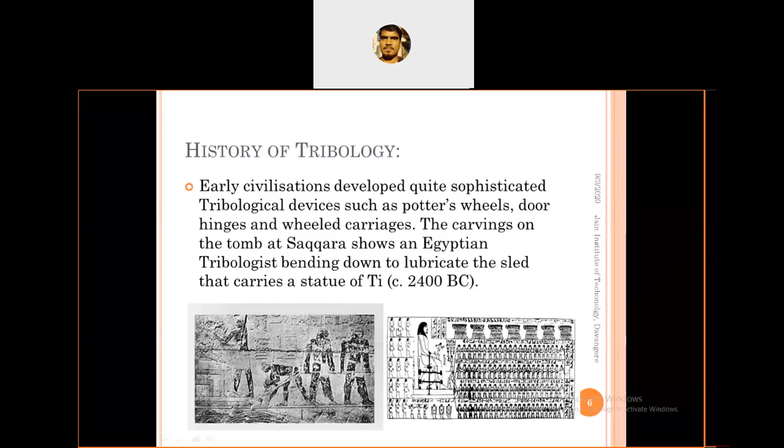That's why nowadays we can see the Egyptian pyramids. The pyramids are huge constructions. They were constructed in BC, between 4000 BC and 1800 BC. Those pyramids are made of huge stones, and the stones were carried from some other place to that exact place using this technique. So by observing this, we can proudly say that tribology is very old knowledge our ancient people were aware of. It's one simple example.

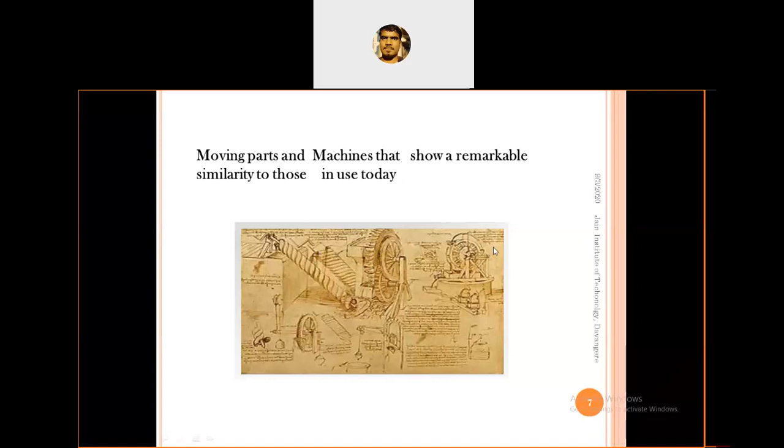The next example: we can see moving parts, machine parts that show remarkable similarities to what we use nowadays. The old Indus and Mohenjo-daro civilizations used these moving parts and some small machines, and those machines are very similar to the machines we are using now. It is also one remarkable step towards tribology, and effective evidence that tribology was used by ancient peoples.

Next, coming to the history in the 15th century, between 1452 and 1519, Da Vinci introduced for the first time the concept of coefficient of friction as the ratio of the frictional force to the normal force. Da Vinci is the first. He introduced not tribology, but the concept of coefficient of friction as the ratio of frictional force to the normal force or load.

He also gave laws governing the motion of a rectangular block sliding over a flat surface. He studied tribology as an experiment: a rectangular block sliding over a surface. When one surface slides over another, definitely there is friction, and friction gives the coefficient of friction. That is what he discovered. He is the first person who discussed tribology.

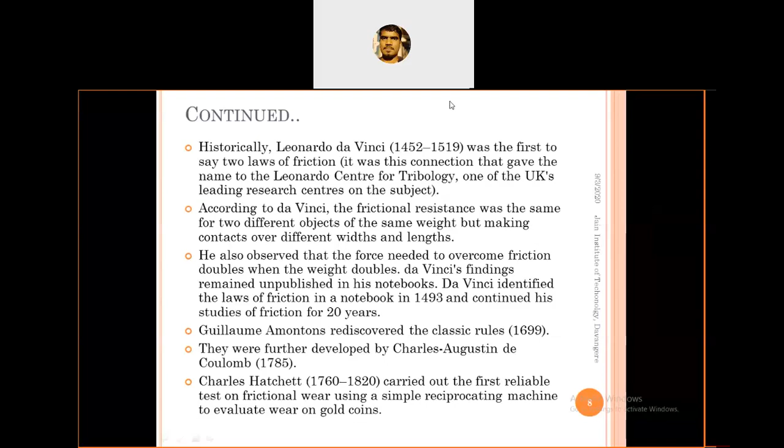And yesterday, I also told that tribology is not a single subject. It is interdisciplinary. It needs other subjects to discover or redefine the concept. If you see tribology as a subject, we need different subjects like chemistry, physics, surface topology, contact mechanism, material science, thermodynamics, mathematics, and mechanical engineering.

In mechanical engineering, we already know loads, stress, strain, deformation. This is what commonly happens in tribology between the two mating surfaces. That is purely mechanical. For equations and calculations we need mathematics. For material science, the property, behavior and characteristics of the material are what we are going to study, so we need material science.

The contact mechanism, that is rolling contact, sliding contact, there are a lot of different types of contacts, point contact. So that is important. And surface topology, whether roughness, waviness, obstructions, smoothness, that is surface topology. Physics and chemistry we also need for the lubricants and lubrication process. Okay, so that is tribology as a subject.

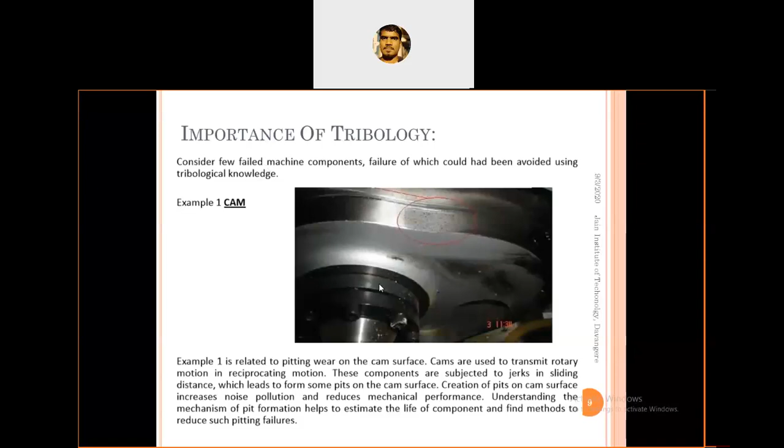This is one simple common example. Second thing is journal bearing. That is what we are going to discuss in the next modules. Journal bearing: what is journal bearing? What is hydrodynamic? What is hydrostatic? That is what we are going to discuss.

Journal means shaft. The bearing which is used to support the shaft is called a journal bearing. So in the journal bearing, first there are two surfaces. One is the journal surface inside, which is in contact with the shaft, and the outer surface is in contact with the bearing. Okay, bearing material or bearing, and inner surface with the shaft.

So in this, there is a clearance between the shaft and the bearing. If the clearance increases, more clearance will reduce the load carrying capacity. So the clearance is very small, and the clearance is completely filled by lubricants. If the clearance is very less, there is a direct contact between the bearing and the shaft, and the bearing material will start to wear off. And this can be reduced by using proper lubrication.

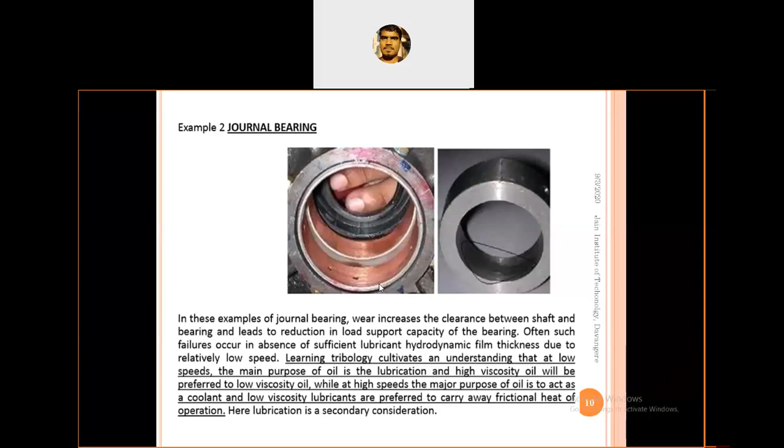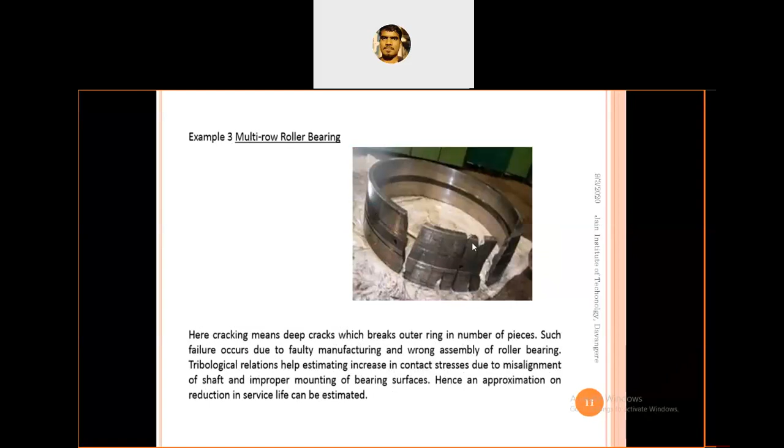There are different types of concepts or principles of lubrication: thin film, fluid film lubrication, perfect lubrication, and so on, that we will discuss in the next module. And multi-row roller bearings, it is also a type of bearing. Here also we can commonly see that because there is a direct contact, there is a direct wear of the material. This also we can reduce by using proper lubrication.

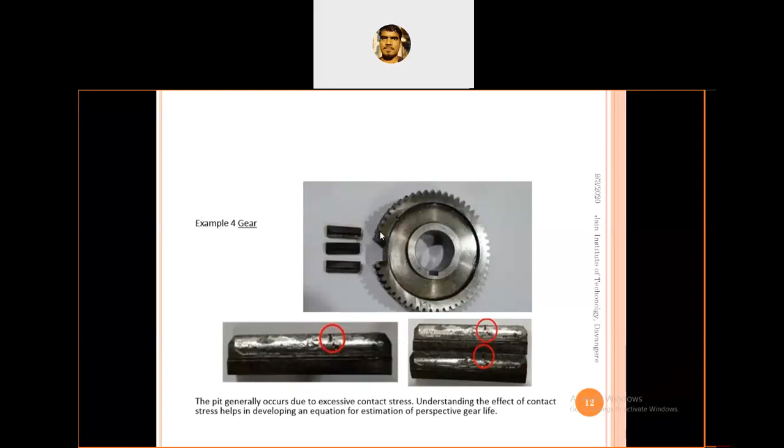Next, gears. Gears are also used to transmit the power from one point to another point. Gear means we need two gears. They have to engage, they have to contact between the teeth. But once they are continuously in contact, there is friction that causes wear. Here also, excessive stress, the accumulation of stress, may cause failure. And these can be reduced by using the proper tribological solution. Okay, so these are some common examples.

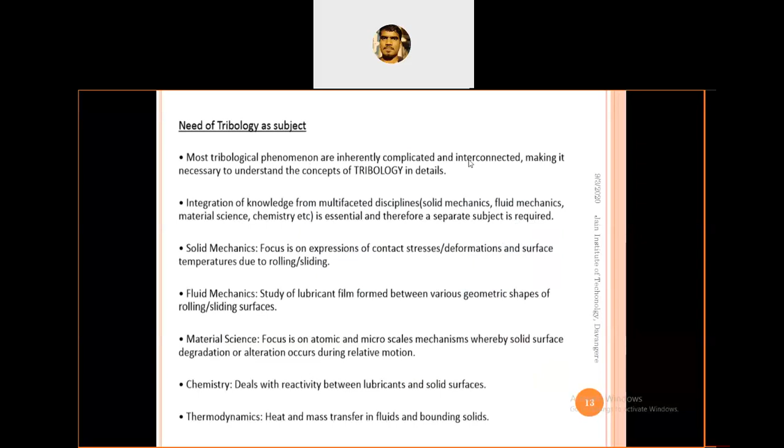So by seeing this, we know that tribological problems are very important. Proper study of tribological problems as well as a proper tribological solution may avoid failure. Every mechanism includes two mating surfaces. No interaction means no energy loss, no friction, and no motion. Where there are two mating surfaces, there is friction. If there is friction, there is wear. Finally, it ends with failure. This is the tribological cycle. It's a problem, a tribological problem. At the same time, we have to go with tribological solutions.

There is no mechanism, no machine and no equipment that is not affected by tribological factors. Every machine, every equipment, every mating surface must undergo tribological factors. It is estimated that nearly 70% of the failures in mechanical or machine components are because of tribological causes. And also a rough estimate says that one third of the world's energy resources

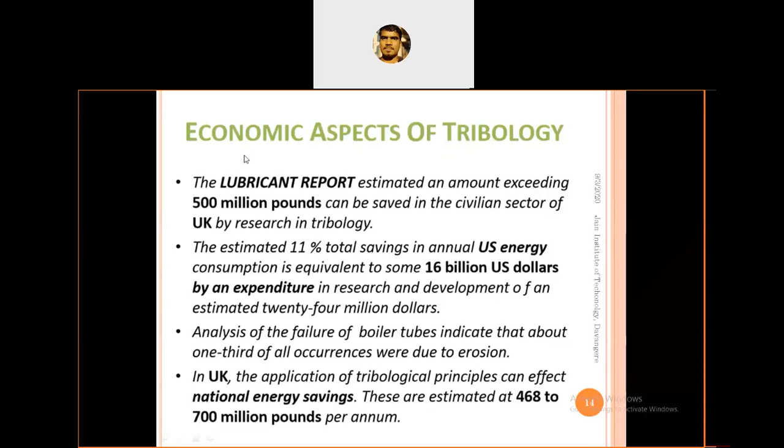Clear? So the economical condition of the country directly depends on the tribological solution. If we use proper tribological solutions, we can improve the savings and increase the economical condition of the country as well as industry as well as the individual person. So we can save a lot of money, increase the components' life, and directly contribute to the economical growth of the country.

Some examples of tribology. The first example, the friction between the graphite, that is the pencil you use to write on paper. If there is friction, then only we can write. That is a positive type of friction. And friction in the bicycle brake. The brake creates friction and stops the rotation of the wheel. That is positive friction. It's in very small quantity.

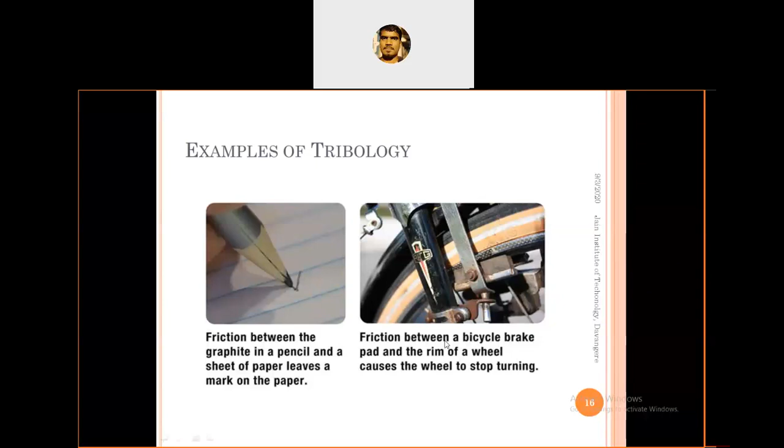When is friction helpful? Brakes, walking. If you want to walk on a smooth, very polished surface, can you walk?

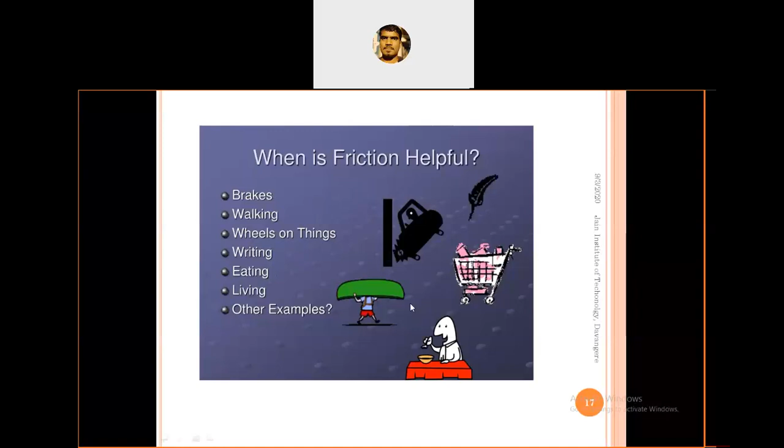Wheels, writing, eating, living, these are all common examples where we need positive friction, but in very small quantity. This is unhelpful friction, which we don't want. We have to reduce the wear of the wheels, tires, brake liners. These tires are worn out because of heavy friction between the surface and the wheel, which causes the surface to wear off.